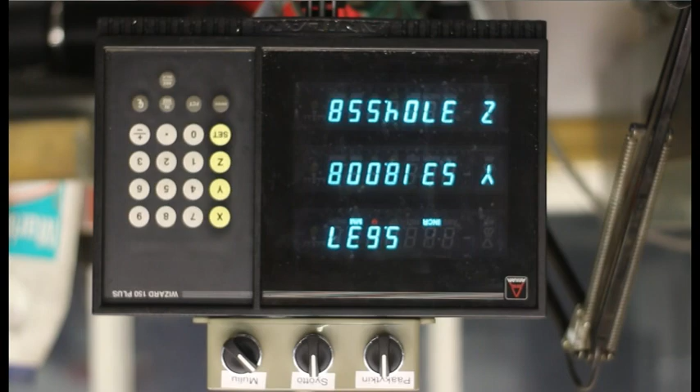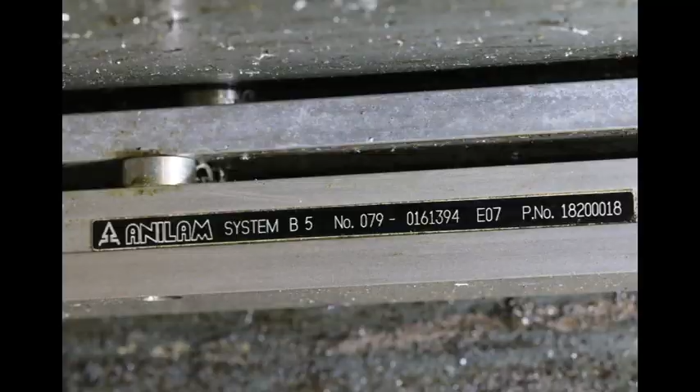I have this Bridgeport style milling machine with Anilam Wizard 150 plus digital readouts. However, now the DRO broke down, and 2/3 of the axes went completely brain dead.

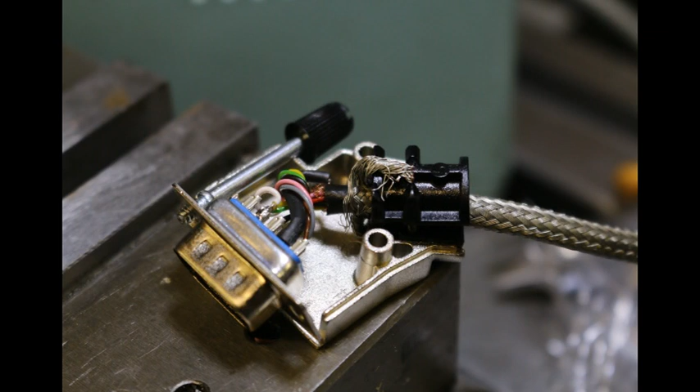It wasn't much fun trying to cope with only one functioning channel for a couple of weeks while waiting for this thing to arrive.

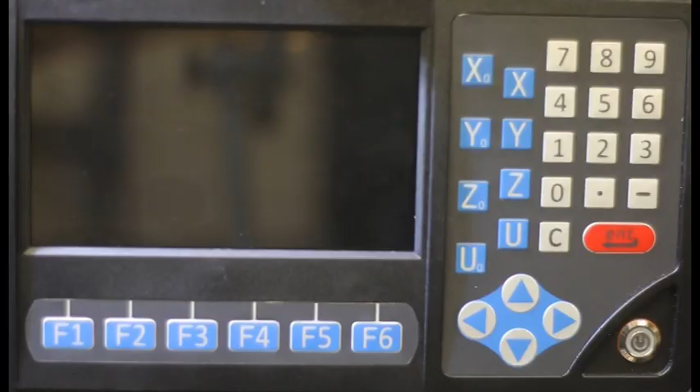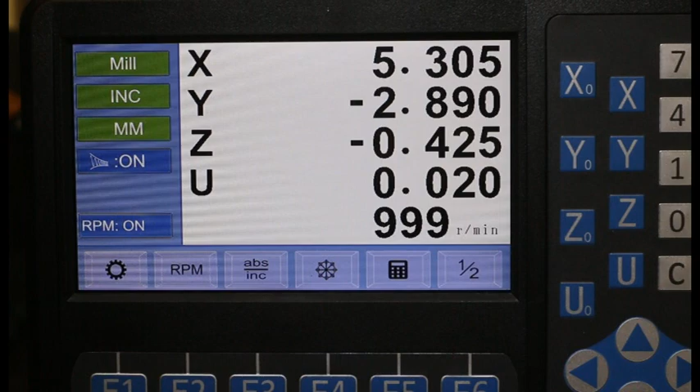It's a Ditron LCD display unit from eBay. Nowadays the scales are often plugged with these DB9 connectors. The old unit was hooked with this kind of round military style connectors. My old scales are perfectly fine and with 5 micron resolution most suitable for this machine, and by no means outdated. The quadrature signals and 5V TTL levels are the same as what the newer scales use.

There are cable adapters for this, but I didn't want to spend extra 100 pounds and bring additional weak links to this shaky and dirty environment.

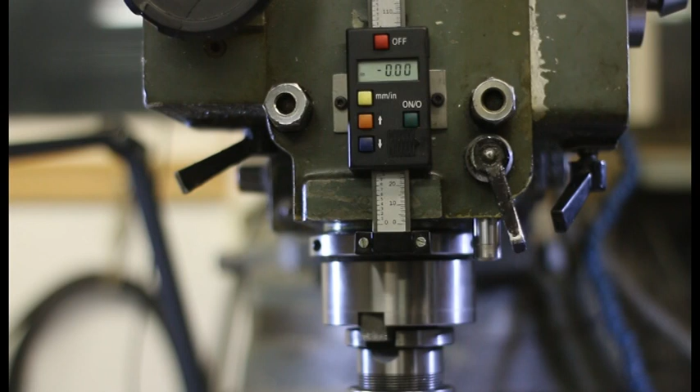I'm not going to show me soldering these wires with my shaky hands, but here's how it turned out. The blue wire in the Anilam cable has no function, simply cut away.

For a medium-sized surprise, all the readings functioned on the first try.

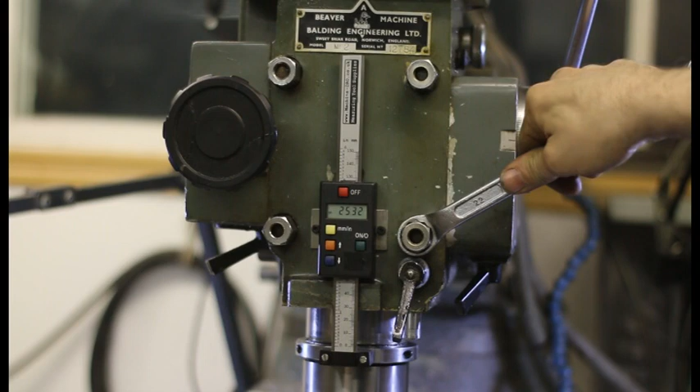Then I made a bracket for the new RPM sensor, which came with the package. Two magnets were superglued to the brake drum at the top of the spindle.

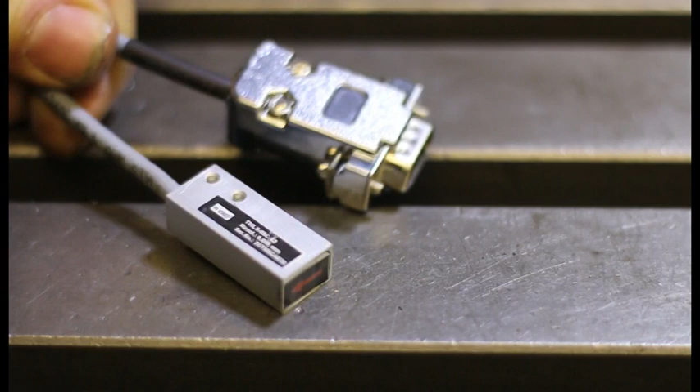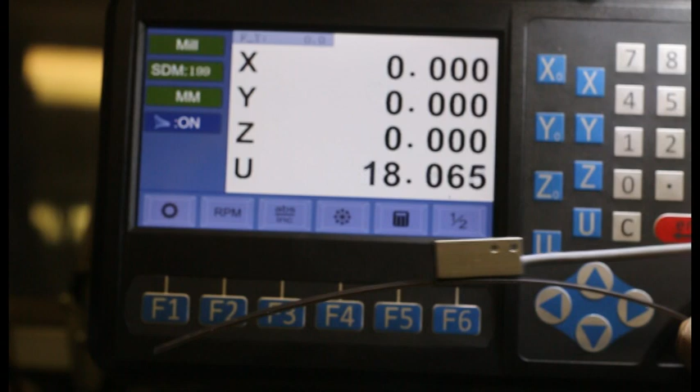Another bracket was made for the milling machine control switch box. Here's how things look from the rear end of the display.

The main reason for buying a 4-channel display is the Quill scale. I've had this digital scale in the Quill for a while now. It kind of does what it should, but usually with a blink for a low battery.

There's no auto power off feature. The refresh rate for the display is terribly slow, and therefore I usually end up drilling far too deep holes. There's a data output port in the scale, but there's no easy way to convert the signal for the DRO.

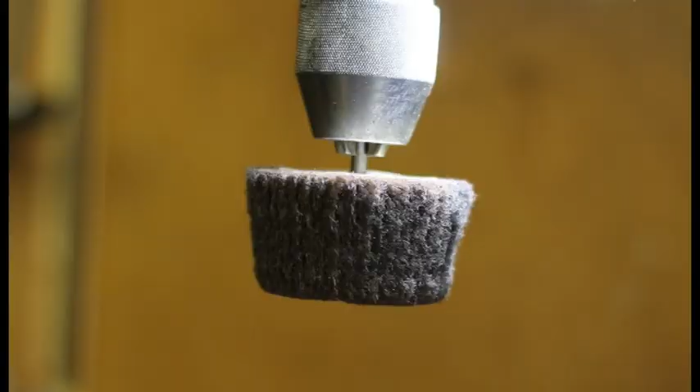There isn't much room for a full-size glass scale, because I want to retain good access to the milling head tilt bolts, and occasionally swing around with my toy hammer.

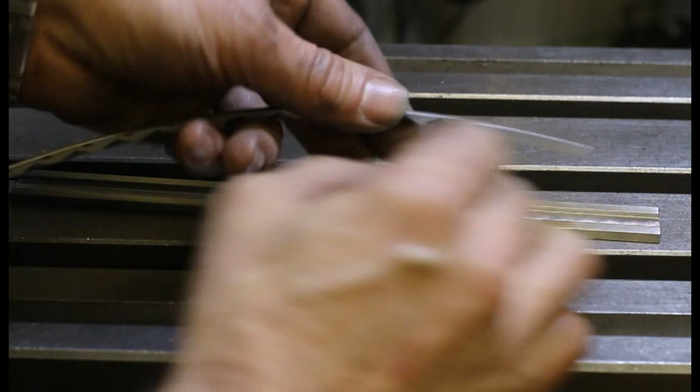So I bought this MDRO 5 micron pickup and a strip of magnetic tape. The system was plug and play connected to the DRO.

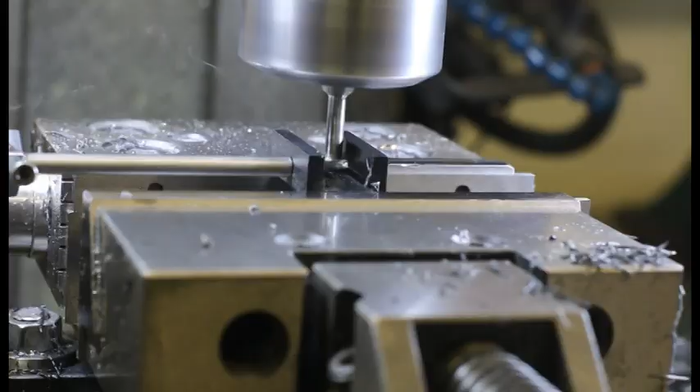The magnetic tape needed some backbone, so I took this stainless steel bar and milled it to the same size the older Quill scale had, so I could use the old brackets.

Someday I will gain money, power and women from making these videos, and I can buy another modular milling vise. But meanwhile I must cope with this lopsided setup.

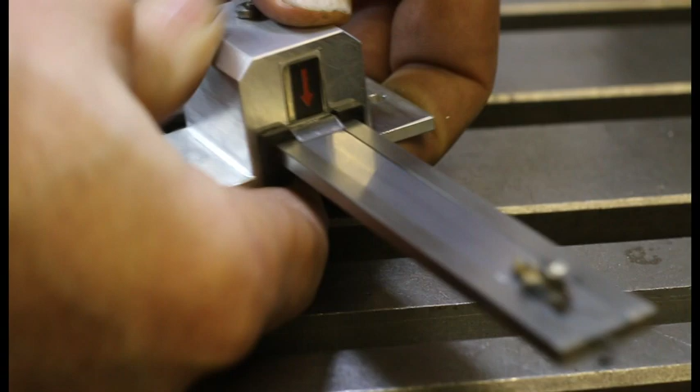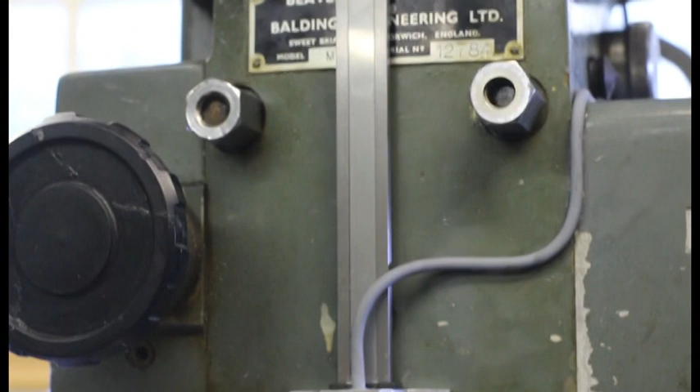Here I'm milling a groove for the magnetic tape, and some Scotch-Brite touch-up. Laying magnetic tape in its groove, and a shielding strip of thin stainless steel on top.

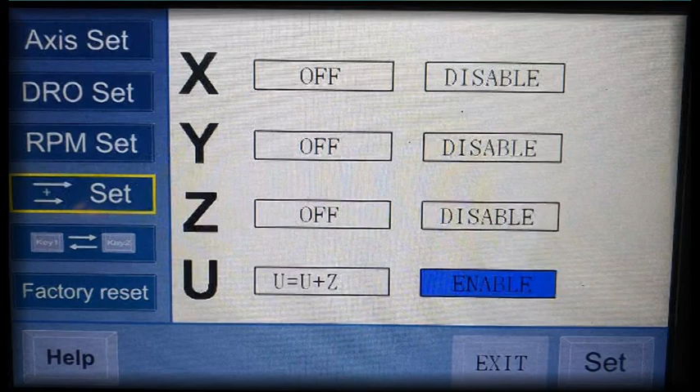Milling a slide bearing out of Delrin, and an aluminium bracket. I added a strip of PET plastic to swipe away ferrous debris before the pickup.

The result doesn't underline the fact that it was made in a shed located 60 kilometers west from the middle of nowhere.

In the display settings, I can configure the U-axis as being a combination of the Quill and the Z-axis.

Here is how the axis summing feature works. I reset the imaginary tool to the workpiece top, and then I change the table height, and the combined scale still knows my actual tool height.

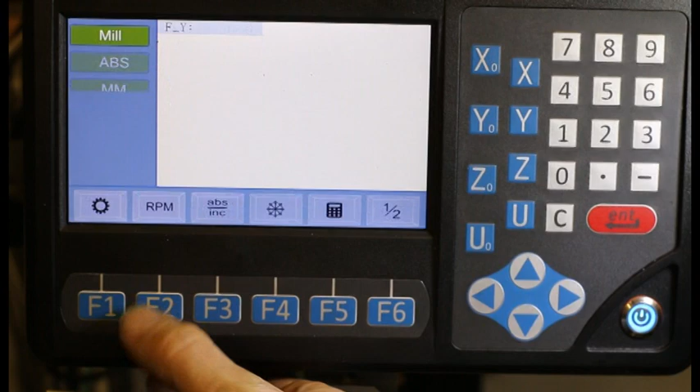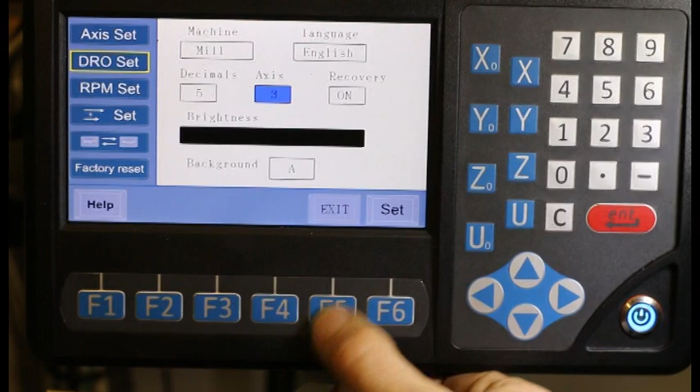But there's a major drawback in the combined scale setup. The DRO just sums the display values, not the actual signals. It leads to very annoying situations when the Z-axis or the combined U-axis is reset. It is most urgent that both axes are reset, or you are screwed with your tool heights.

And that's why I placed an order for an encoder signal summing interface.

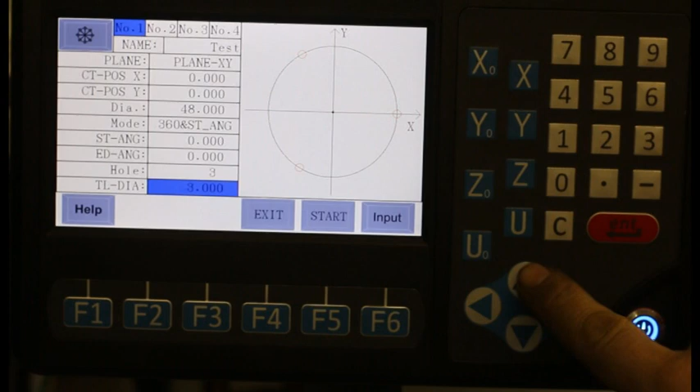Another reason why I ended up hating the fourth axis in the display is the alignment between the axis value and the reset buttons. The Z-axis and the U-axis buttons are awkwardly off the line your finger would naturally gravitate to. The problem is even more pronounced when the spindle speed is displayed.

It would be nice to have the RPM value displayed in the background, just like the feed rate is. I made a 3D printed sign to guide my finger to the correct row, but that wasn't much help. I probably will stick to a 3-axis setup, at least until the Quill summing device arrives.

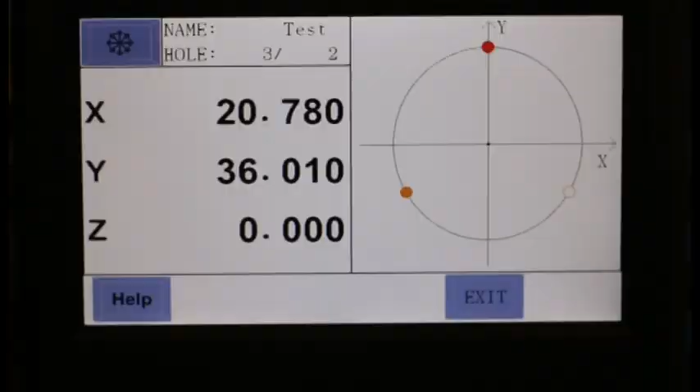And now we can jump to the cool gadget of the new display. Most useful for me will be the circular hole pattern.

Hole pattern functions have been around for a good while in these things, but the LCD display is certainly bringing this to a more user-friendly form.

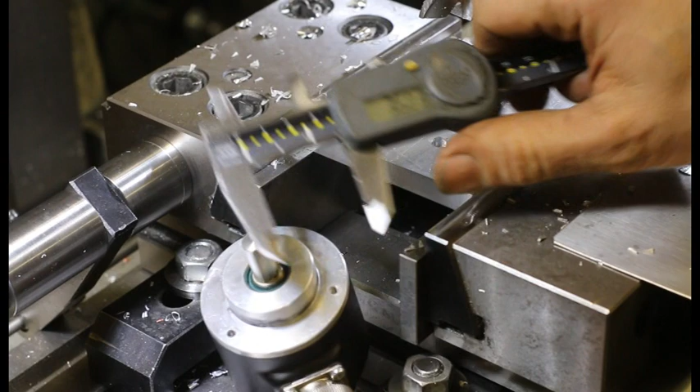The user logic is just what you can expect for the price, and can sometimes be frustrating when hitting the enter key has been forgotten.

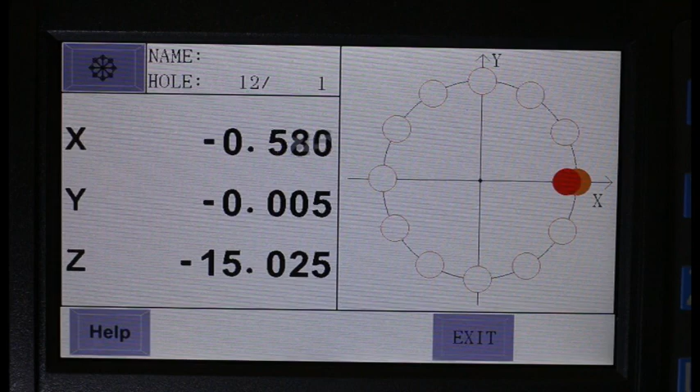But here is when the LCD really kicks in. I want to change the pattern start angle, and I get graphical feedback instantly to check that things went the way I wanted.

The next task is to sync the orange chip with the red cannonball.

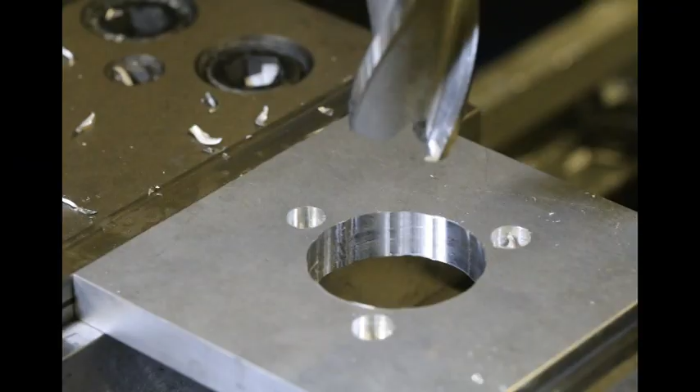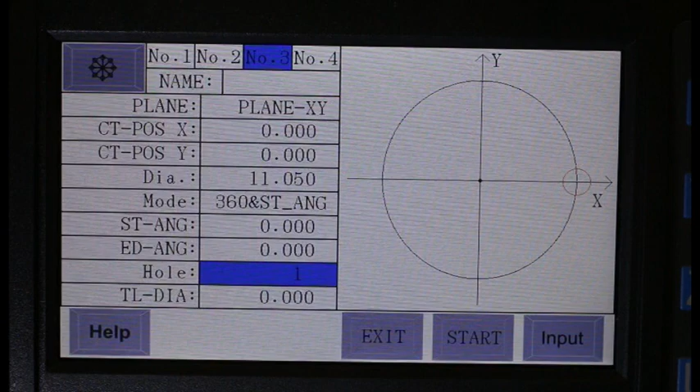Drill the first hole and move to the next. Another neat thing where the hole pattern function can be used is for widening a hole.

Here I want to make a 36 mm hole with a 25 mm end mill. The difference in the diameters is 11 mm, and here I'm giving half a millimeter for the finishing cut, making the roughing cut in 12 divisions.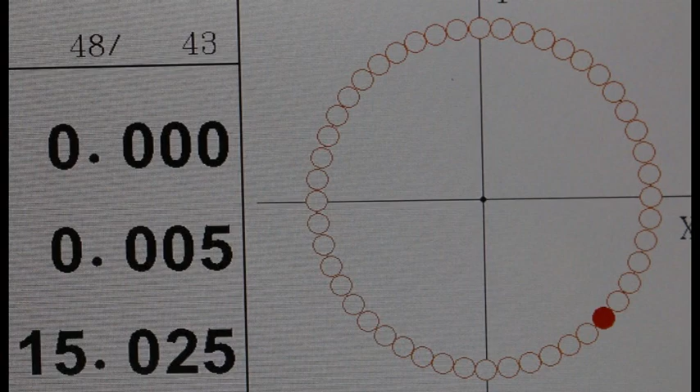The DRO thinks we are drilling holes, but I'm just widening the bore. Here's the result from the roughing cut - a good start for a boring head operation.

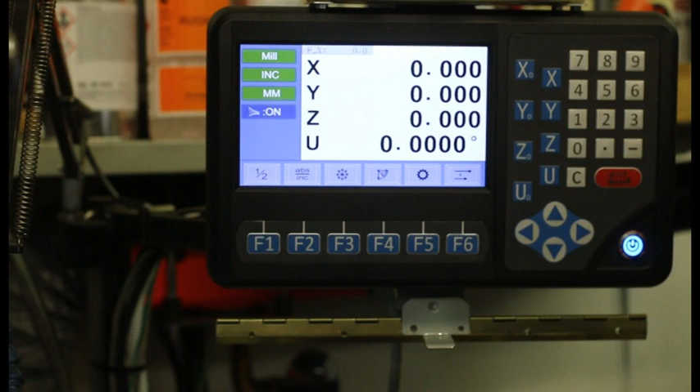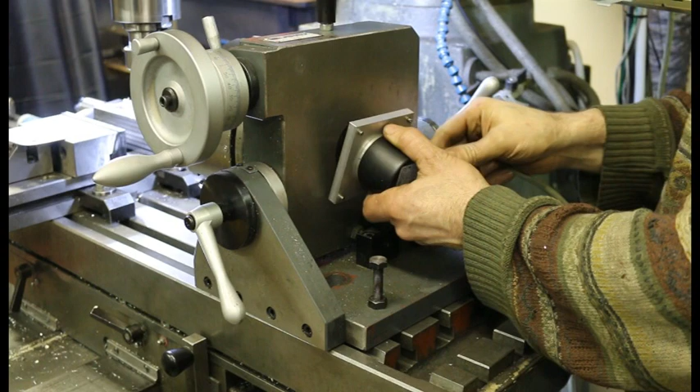But in this case I wanted to bring things one bit further. I will make the final cut by interpolating the circle with the hole pattern function, making it slightly loose fit and using 48 divisions for the cut.

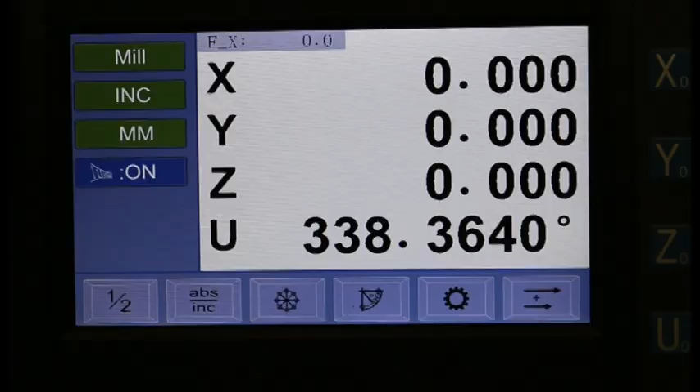This is real human-aided manufacturing.

Moving clockwise here gives less chattering in the cut and better surface quality. The fit is quite nice here.

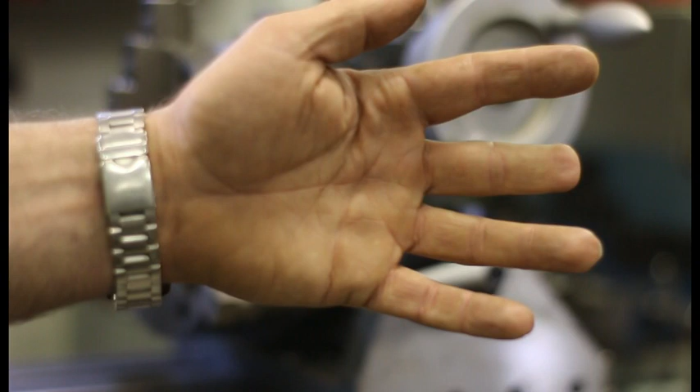I think this method can be used for something more accurate boring too. The closer the mill diameter is to the desired bore, the better the result will be.

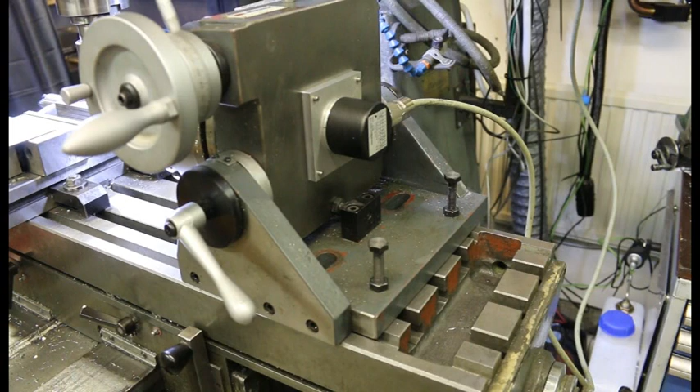And here is what that flange was meant for. I have this rotary encoder with 5000 pulses per revolution accuracy. The quadrature signal system is kind enough to multiply the resolution by 4, so I have 20,000 positions per one revolution here.

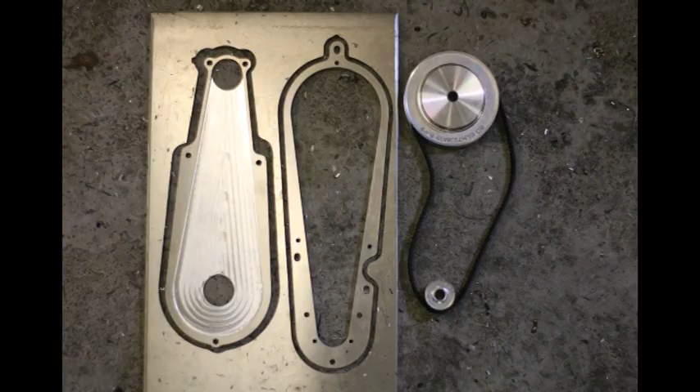The encoder snaps with magnets to my dividing head. The angular position of the dividing head can now be read from the DRO. My U-axis is now configured as rotary.

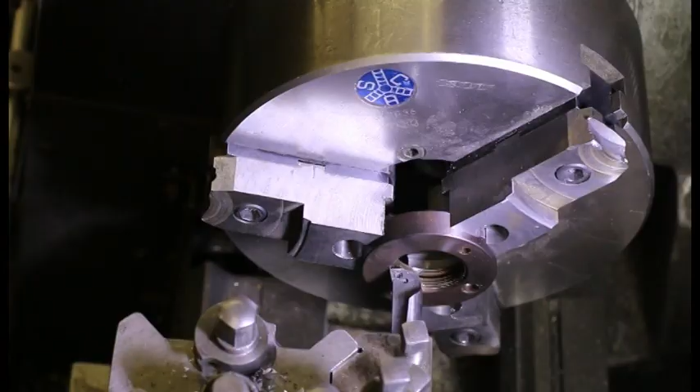My quick and dirty encoder mount has a few major design flaws. The encoder obviously blocks the dividing head bore for longer stocks, and the encoder hits the stopper block when 30-degree tilt is exceeded.

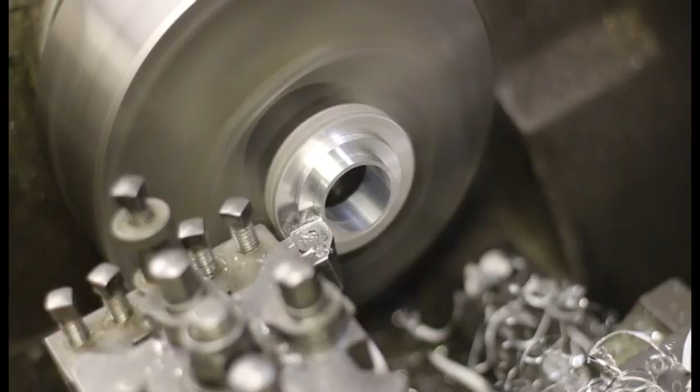So I decided to move the encoder from the center to this side. I CNC milled a frame and a housing from 6mm aluminium plate and bought some timing belt stuff.

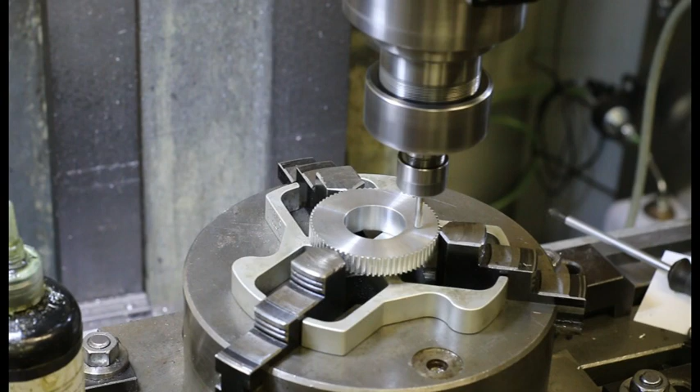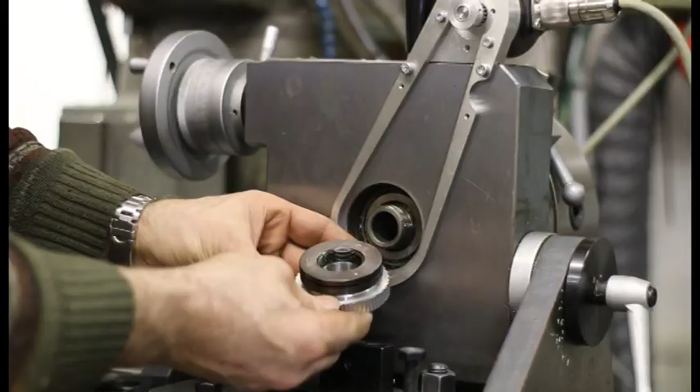Then I removed the hub nut for some modification. I turned a recess behind the threading.

Then I removed the flanges from the bigger timing belt pulley.

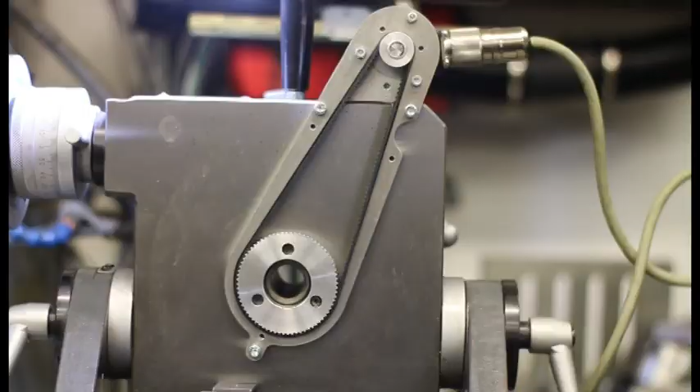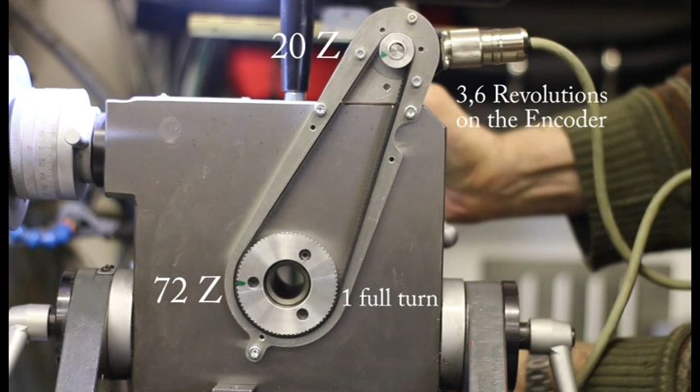Made the bore bigger and turned a matching diameter for the hub nut. Drilled a few holes. And reassembled it back to the dividing head.

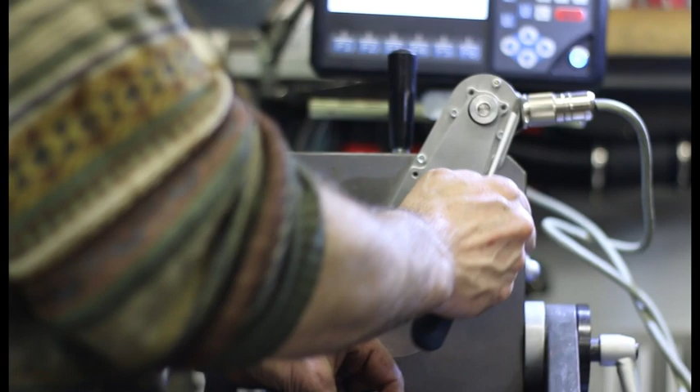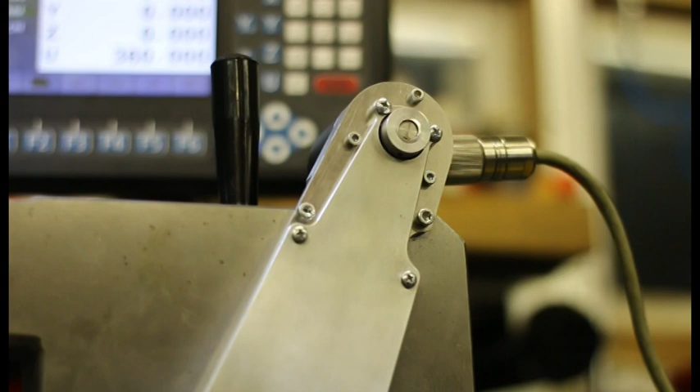One of the screws jams the nut just as it was in the original design. Then I placed the belt and adjusted the tension.

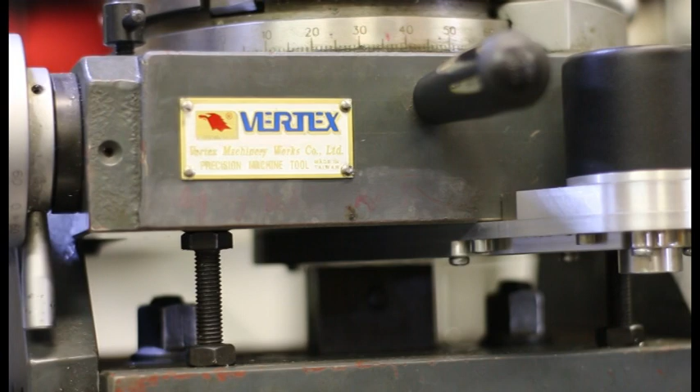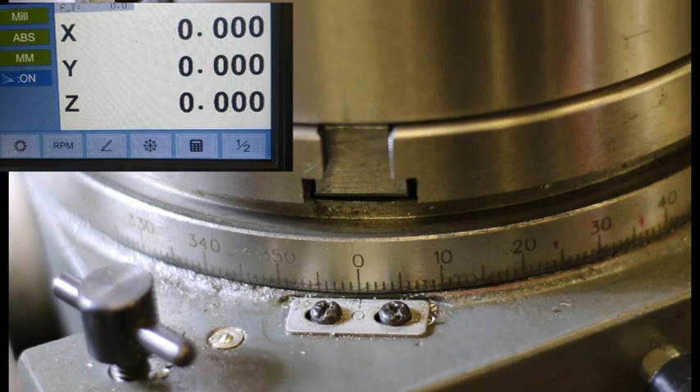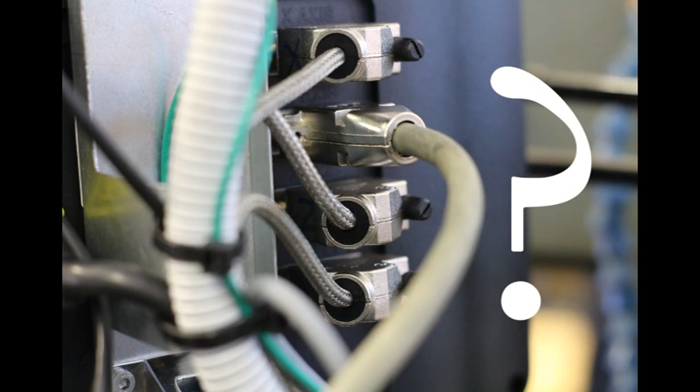You may have noticed that I have a step-up ratio here. As the dividing head turns one full turn, the encoder takes 3.6 revolutions.

This is for matching the output resolution to my linear scale. We'll get back to this later, but let's first finish the assembly.

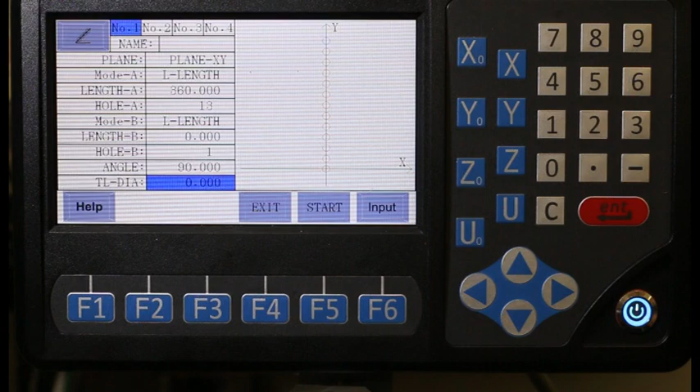The dividing head can now be plugged to any channel in the display without any changes to the signal settings. 1 mm equals 1 degree.

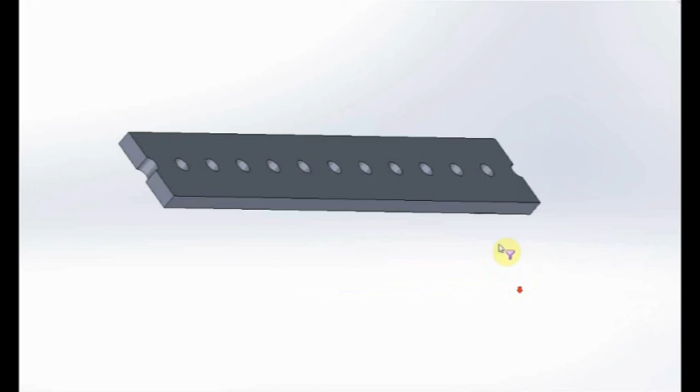Why is my rotational axis now hooked to the Y channel and the Y-axis scale is temporarily moved to the U channel? Here's the reason: the linear pattern function can't be used with the U channel.

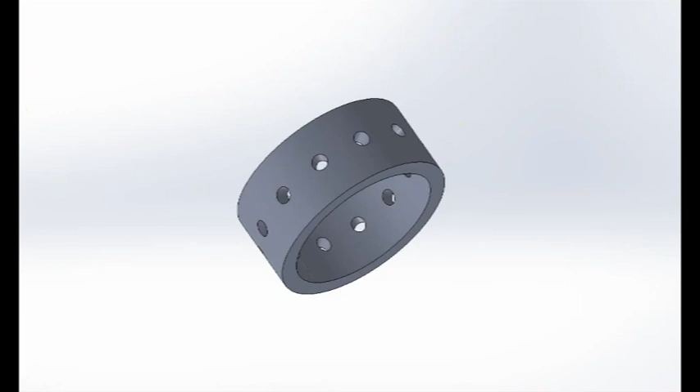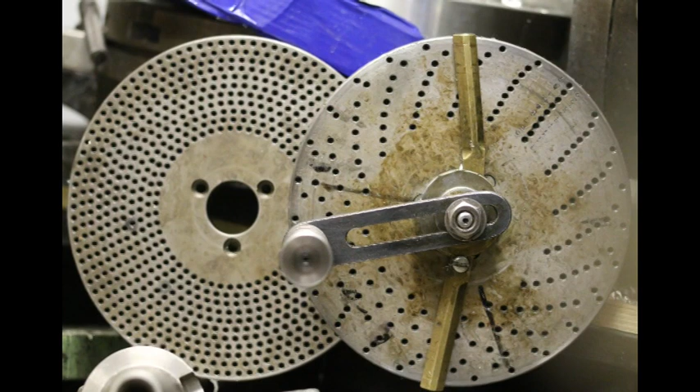I choose the XY plane and length for the string 360. I want 12 divisions, but I must input 13 here because 0 and 360 is the same position. Then I orientate the string to the Y direction.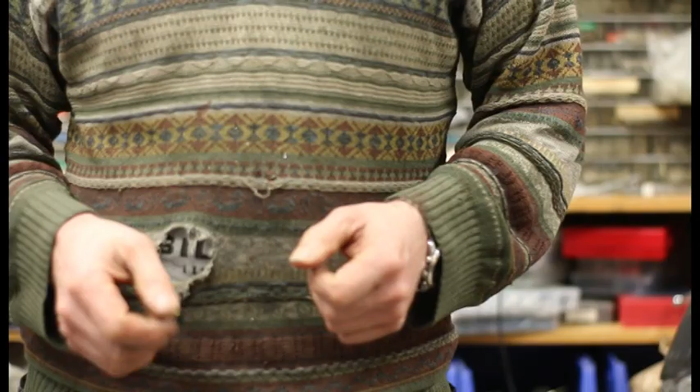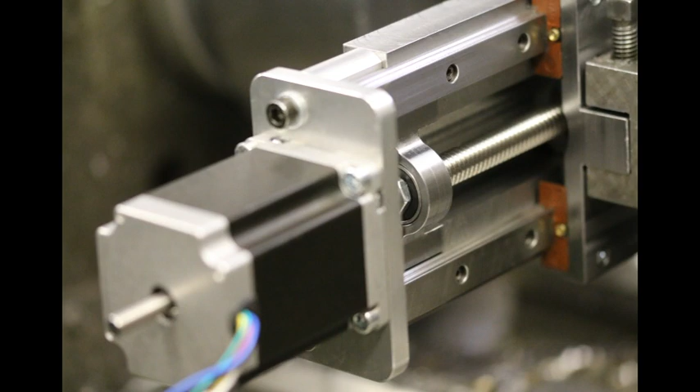Let me clarify what's going on here. I want to do some machining to a solid of revolution. I let the DRO think that I'm drilling holes in a row.

The workpiece here is 360 long and 30 between the 12 holes. DRO is talking millimeters, and I'm doing degrees. I feel a little bad cheating like this in this early stage of our relationship.

Now we are finally sucking diesel here. I can easily make this part with my new digital friend. I just don't know yet what this part is meant for.

I think these indexing plates are never going to sit on my dividing head again.

I hope you got something out of this video. I had a lot of fun playing around with this new display, and despite a few of its flaws, I have learned to like it, and I'm not at all sad that the old unit bit the dust.